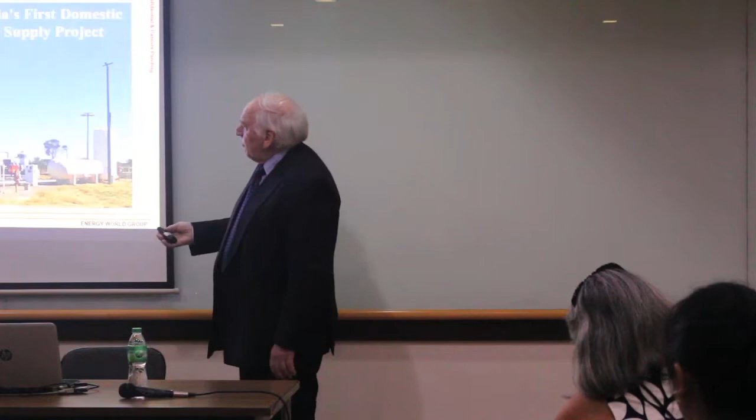We also supply small power stations, like this 8 megawatt power station. A lot of people think we can't do it, but go back to our first LNG plant in Australia, which has been running for over 20 years and delivered LNG over 400 kilometers to an 8 megawatt power station, and it was still economical.

Here's our own gas fields in Eromanga in Queensland, and in Gilmore, we have gas in the ground, which we can develop as the full project.

Under development in Indonesia, this is a liquefaction plant, so we're taking the gas and we'll liquefy it here. You have storage, these are like big fridges. We take the gas, clean it up, liquefy it, reduce the temperature, and then store the gas at minus 160 degrees in these big tanks.

In South Australia, we're involved in a very big gas field there, called PEL 96. So there's a lot of gas, and that's the most important thing. They're talking now that, because of all the shale gas, there's more than 200, 300 years of gas supply available.

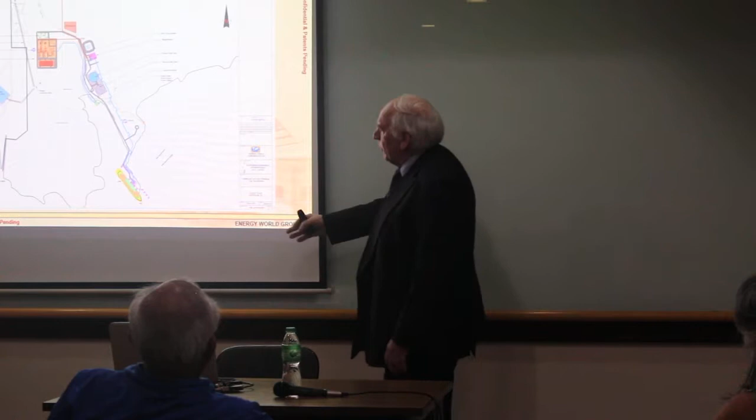So again, building the big jetty that can take the largest LNG ship, and again the tanks, and then we need the power station. You need to be able to burn some of the LNG because you can't just store it, since it boils off, so you have to have somewhere for that to go.

So again, this was the groundbreaking and the scoping, and I put this slide in recognition of the first governor there. Unfortunately, he got killed in a helicopter crash, but he did give us a lot of support. This is Governor Suarez here, and he's been very supportive.

This was just to show you some of the construction of the big tank. This is approximately 80 meters in diameter, the wall is about 1 meter thick, and it's built to the highest seismic standards — this is zone 4 seismic. So the amount of steel and stressing, everything has to allow for about a 5,000 year return cycle of earthquakes. This is very, very heavy construction.

And again we were able to use the slip form system here. This tank can hold 140,000 cubic meters. This is the dome, the roof going on, the pipe supports going on, and the second tank foundation all being done.

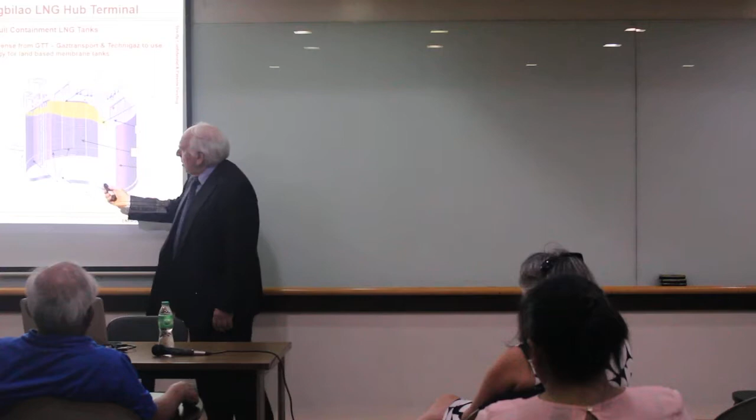And this is then the membrane that goes inside, just like a thermos flask — it's insulated, and then you have the stainless steel that protects the insulation to keep it. So you can see it's very big insulation, and this is provided by GTT of France, that provides the insulation to about 95% of all LNG ships.

They're membrane ships. Now what they always like to show you in a picture, if they show you an LNG ship, they'll show you the ones with a big dome — they're called the Moss type, and they're quite old-fashioned actually. But the membrane type is more efficient, carries more LNG, though they don't usually show them. Again, our jetty is built to be able to take the largest ship down to even the smallest ship, so we can bring in LNG, and then load out LNG for redistribution throughout the Philippines.

This was where the jetty is, you can see at the end, and again a few slides of building the jetty. Again, you'll see very heavy reinforcing in. Piles are 1.5 meters in diameter, and they're all 45 meters deep for the piling here to support the big ships.

Control buildings - these are the only ones, and confirmed by all the port people, the only quick release hooks. So in other words, everything, if the ship's tied up, the LNG ships, and it needs to be released quickly, it's fully automatic. Everything can be let go and the ship can move off the jetty with no human involvement. And you can see here the jetty then down to the tank.

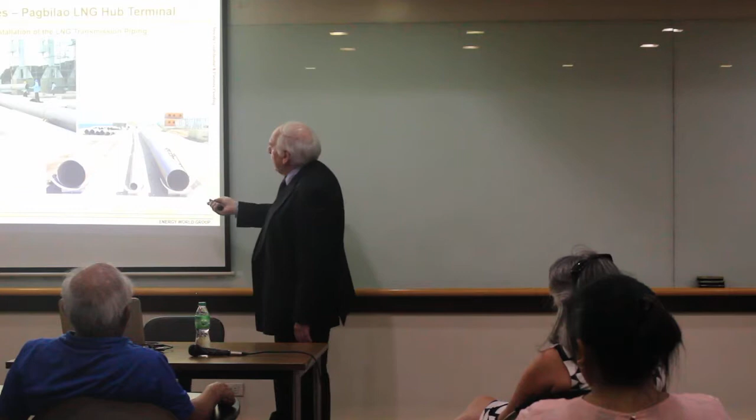And the fenders, some of the largest fenders I think in the Philippines. These are the loading arms that bring in the LNG and the gas, and then also reload the ships if necessary. Pipelines. And then to do that, we said let's build the power station so that we've got economical power.

So 650 megawatt power. Turbines - we see them, they're all brought in by sea, delivered to the site. Construction all carried out. And you can see these are virtually all ready to go into operation.

Siemens equipment - now these are some of the most efficient in the world. They've got efficiencies of about 60%, but they're also fast start-up and fast turn-down, so if there's any requirement to move into the market very quickly, these can be switched on very quickly and switched down very quickly. So they're very, very efficient turbines.

So bypass stack gone in. And then this is the steam turbine, switchyard's all ready now. And this is a steam turbine that will then turn it into a combined cycle. Regasification, seawater cooling or seawater heating for the LNG.

Very simple system. Pass seawater through a heat exchanger, pass the gas one side, seawater the other side, and you get cold water comes out the other side.

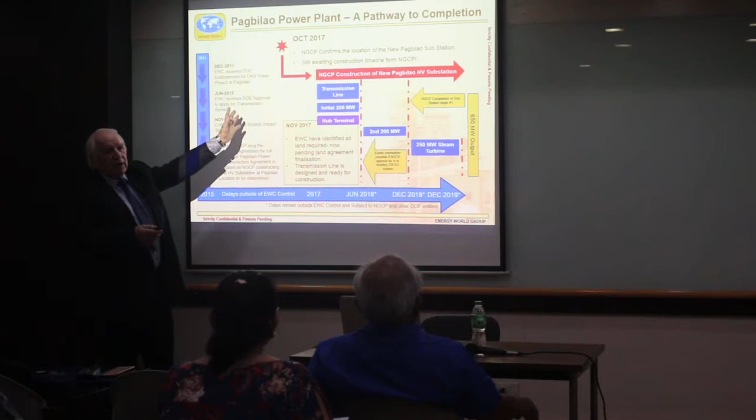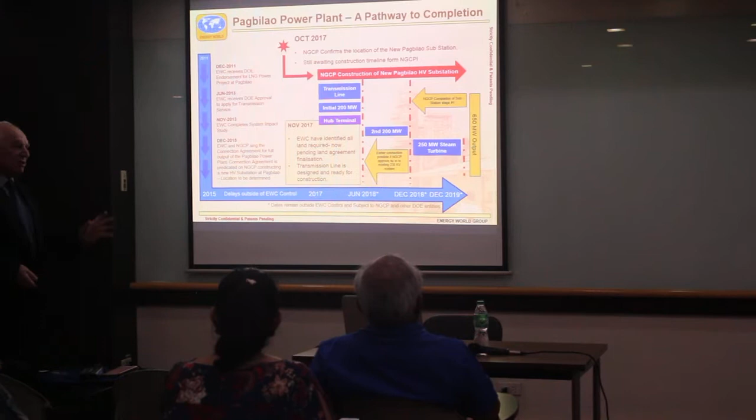And I put this one up there just to show you, because you can have this in your records - this gives you all when we received the DOE confirmation, and then how we finally got the confirmation of the location of the power. They gave us a connection agreement about, I think, a few weeks ago, they gave us the final word on where it will be. So until we got that date, we were not able to find the land allocation to get the right of way to the substation. So this is, in some ways, what's going to be the problem, you could say, for the Philippines in the future, and I think it needs more looking at than us.

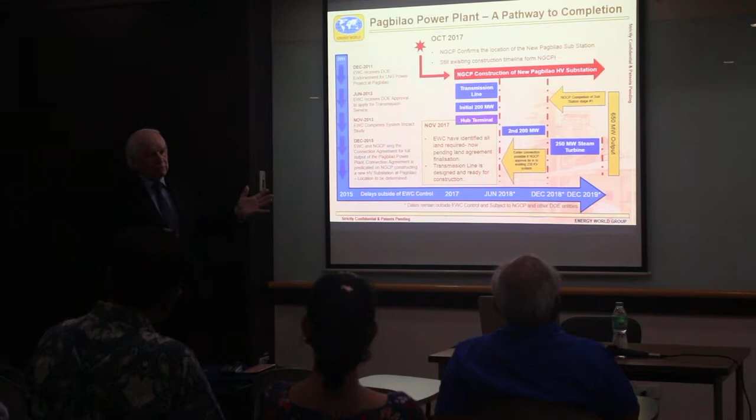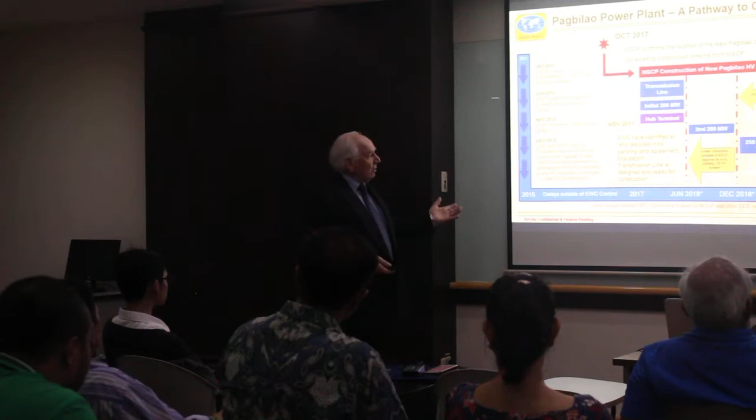If you don't have sufficient transmission lines and a good enough system to get these connections in quickly, obviously you're not going to get the power into where it's needed. So although this is complicated, you can read it when you get time, you'll actually see what's been causing some of the issues. And so this is what was delaying it.

Now you will see here, this is the fun in the Philippines. The reason we built it here is because sitting in our own land is a transmission line that had a lot of spare capacity. But next door is also a coal plant, and they rushed to make sure they grabbed the transmission and built another 400 megawatts. Even though they built 400 megawatts, there's still capacity in there, and the rules of the Grid Code are that it should be first come, first served.

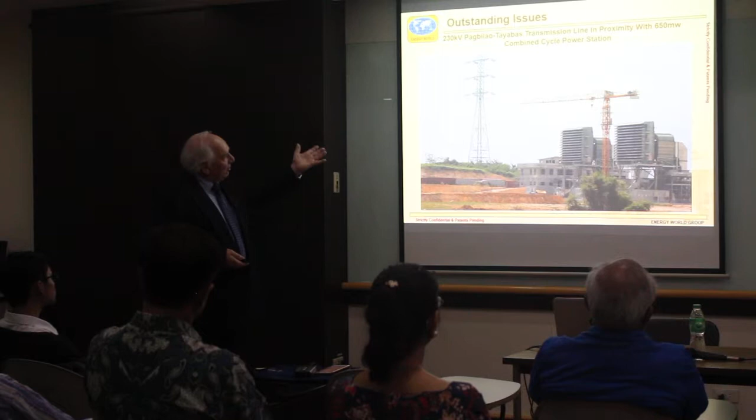And in fact, they're still looking for us to connect in here, as well as the transmission connection 11 kilometers away - there's still a hearing now on whether we can connect to them. But again, being first, you face a lot of these issues with coal plants, the resistance, and you have to put up with it. But you can see, we didn't build it where we didn't have a transmission line. And this transmission line's got another - it's got 700 megawatts, and again could easily be upgraded to take another 1,000 megawatts with just a simple upgrade.

And again, you can see very clearly where it is. You've got the plant here, the transmission line running right by the side of it. But it's delayed, I would say, 2 years trying to get this sorted out. There was also the 69 kV line, which could have been upgraded. And again, a lot of frustration.

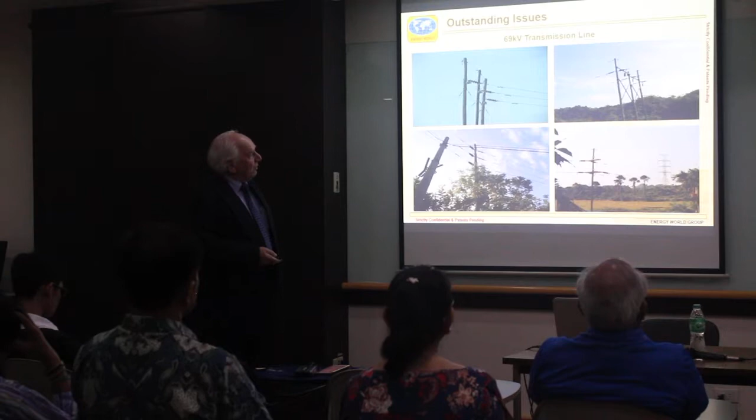Who owns it? You can study these in your papers and see what we're working on to do it. But that's basically all the connections that we're putting in.

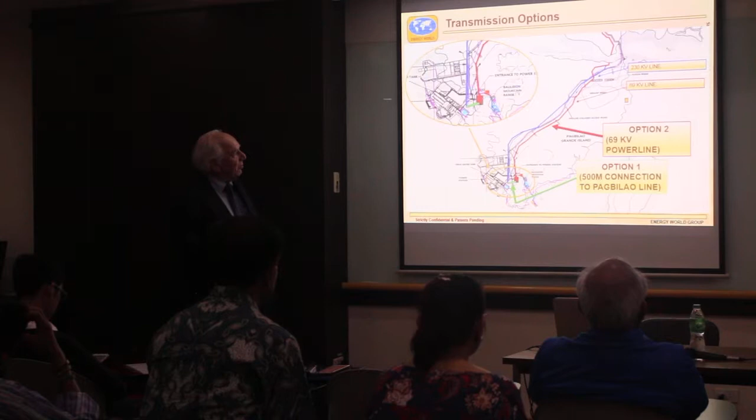So you can see the hub terminal is 90% complete, pending completion, but the 650 megawatt anchor tenant means we're virtually ready to go with clean energy.

But what we can do then is not only bring in the LNG for the power plant, that was only one thing, to build the terminal. That was only one facet, if you remember, of the Department of Energy's presentation. We then wanted it for distribution throughout the rest of the Philippines, to take it to some of the smaller islands, smaller power stations.

We've built our own ship. We have our own ship. The two domes I talked about, they don't belong on the ship - this was actually being loaded in Boston, America. So the two domes don't belong to the ship, it's just a flat area here. So this is a membrane ship.

So we're ready to bring in the LNG even in the ship and just take it straight into the power station. So we're virtually ready to go.

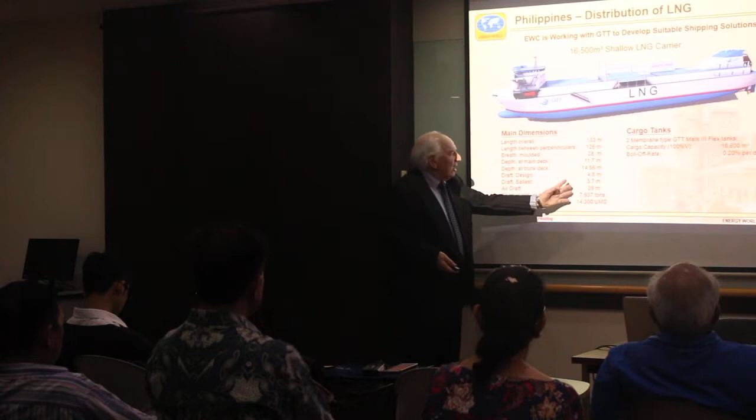These are some of the smaller ships for the distribution. We're working with GTT, as I said, the people who did the membrane, to build these. They want a very shallow draft, 4 to 5 meters, which will give you a lot more access to where you can take it.

Storage, not recommended in the typhoon areas, but you can use barge storage on a temporary basis to bring in LNG if you want to. But when you have up to 23 typhoons or more a year, as you get in the Philippines, it's better to put it on shore and turn it into concrete, because otherwise you could lose one of these.

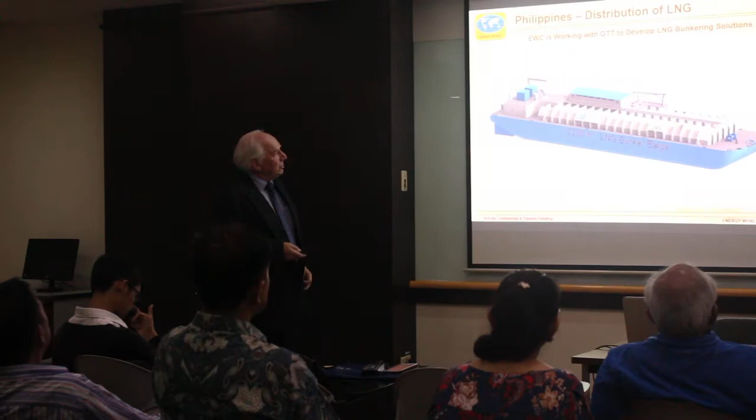Again, the barge. Now this is very interesting, this has been built, this ship. This is a bunkering barge built in America for bunkering ships.

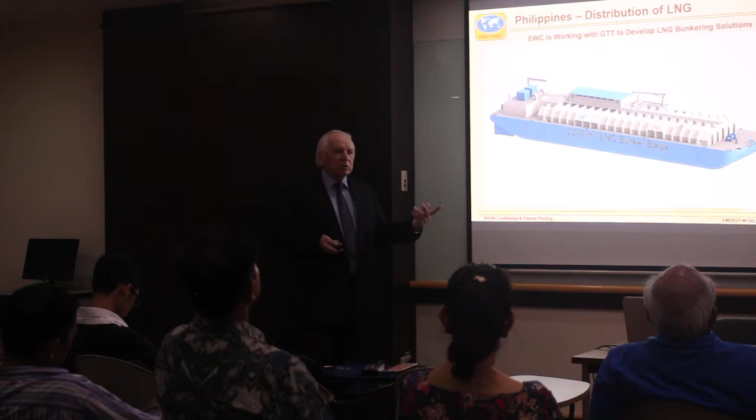Now many of the cruise liners now want to use LNG because they want to promote a clean image. They don't want to be using dirty fuel, and in the future, even the ports are offering a 50% reduction in all port costs if you use clean fuel. So even the Philippines will have to start to make allowances for bunkering cruise ships and other ships that use LNG in the future.